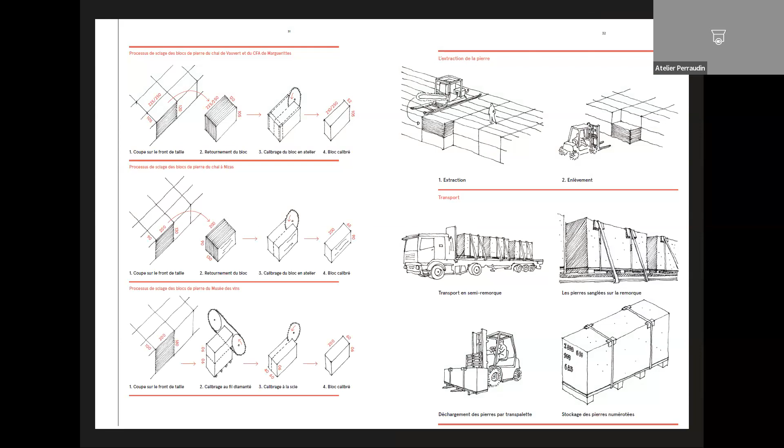But the first question is why we build in stone. It is not because it is a beautiful material. It is for two principal qualities. The first quality is it is a natural material. So we try not to use concrete to preserve the environment, because concrete uses energy, of course, but also sand and water and very rare material. And the second is because it is a healthy material. The first building of our office was our own building, our winery, because we make some wine in the south of France, in Vauvert. And we searched for healthy materials without any chemical emission. And you don't have a lot of materials, because wood has some treatments. Concrete, don't speak about that.

And stone was a very good material for a winery, for the inertia of course, because we are in the south of France, it is really warm, and we need something to keep the coolness for the wine. But if we do it for wine, why don't we do it for children, for school? I think it is more important to use good materials for children than wine, but I really like wine too.

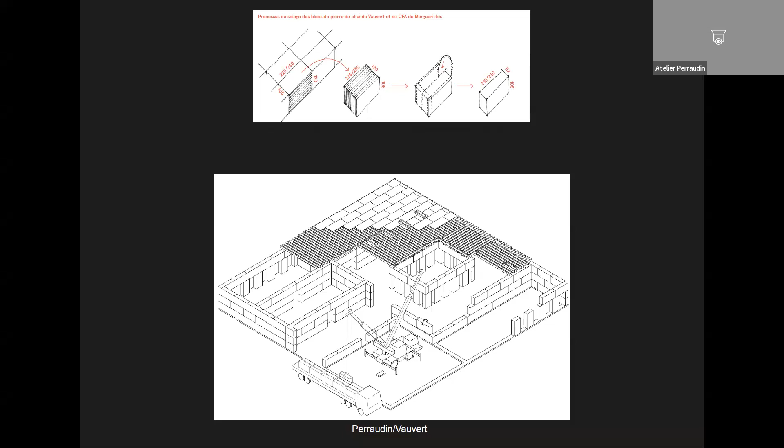So I will make a short introduction to describe what is stone, what is a quarry, because you can't understand massive stone, structural massive stone, if you don't know what is a quarry, what is a block of stone, how you get it, because it is the start of our work. You don't build the same with very stiff stone and soft stone. It is not the same, and the extraction is very different too. I will explain different projects, and every project depends on this stone. So you have to know that.

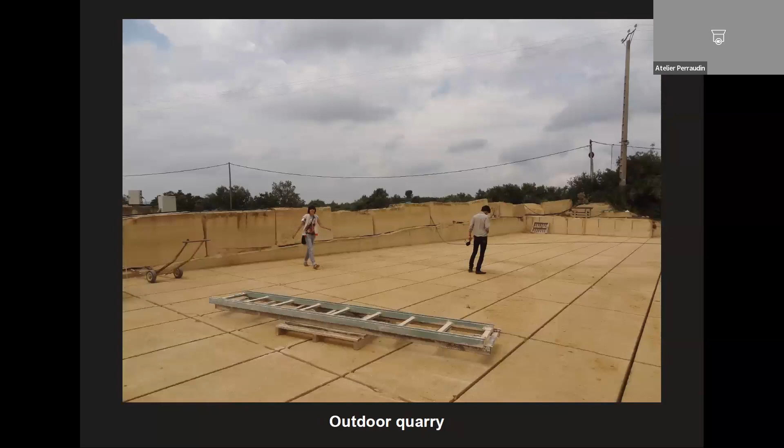It is a really big quarry. They don't work anymore, but it is very beautiful. The problem of the underground quarry, you know, is that you have a tunnel. You have just one way to extract. You don't have the capacity to extract a lot, but you also have the outdoor quarry. This is the cheapest one, because I didn't say that, but we use stone because it's cheap. Using massive stone is cheap. We build social housing. We build every program with stone and with the same budget as if we built in concrete. And that point is really important too.

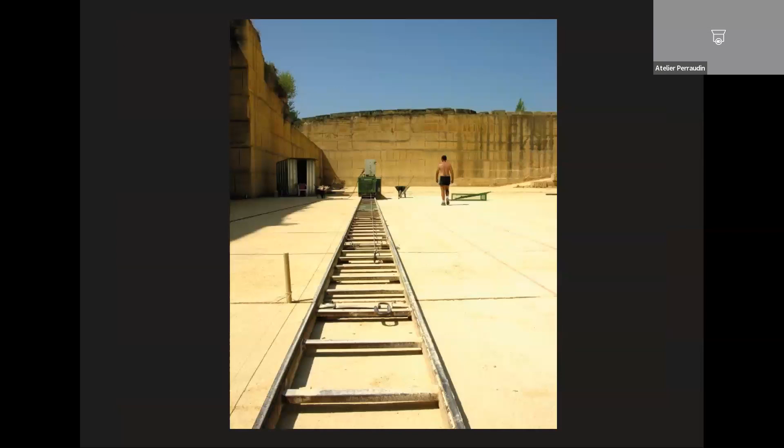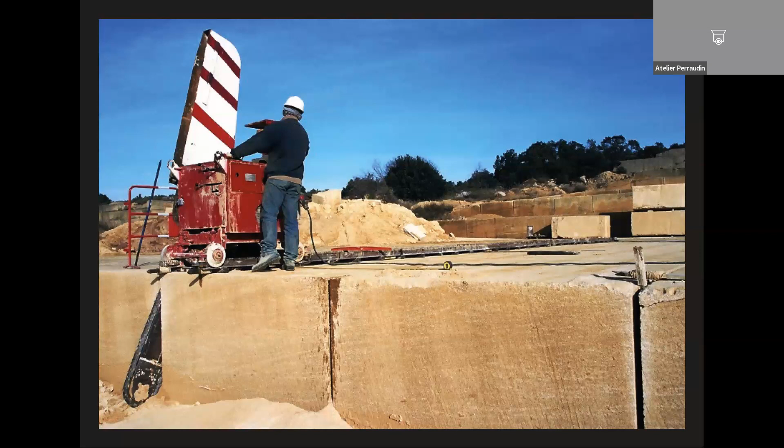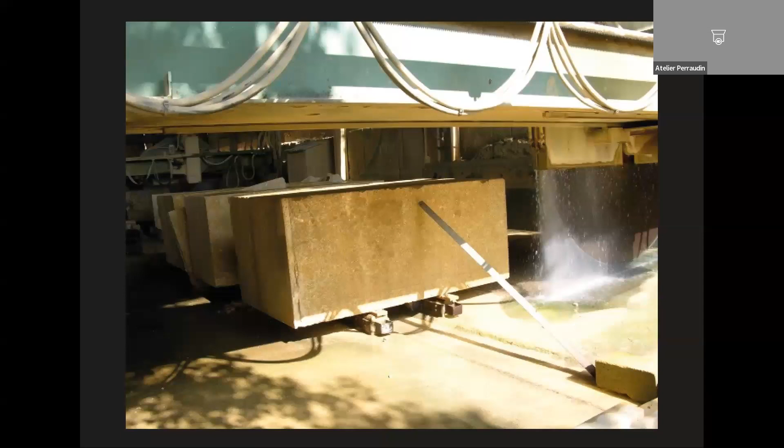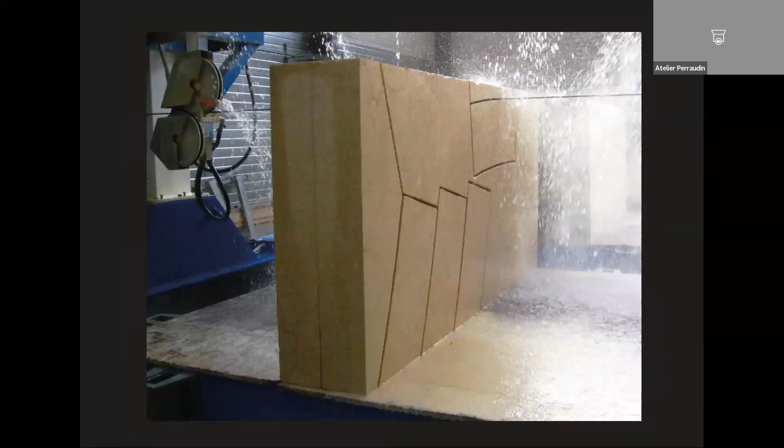So you have the quarry, and how does the quarry work? You have a rail, and on this rail you have a chainsaw, like a block of sugar. Then you cut vertically and you cut the other way, and you just extract it. And that's enough. You have your block to build. Then you have a big saw to cut it at the dimension you want. Or a chain, but the problem of these tools is you lose a lot of stone because you have a particular cut, and if you have a lot of loss, it's more expensive.

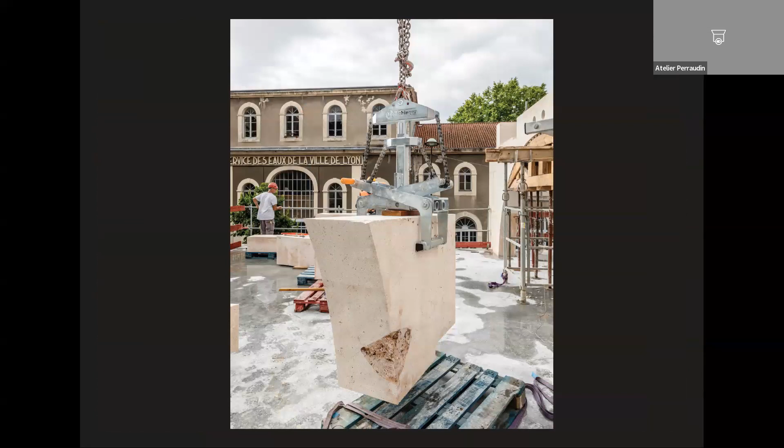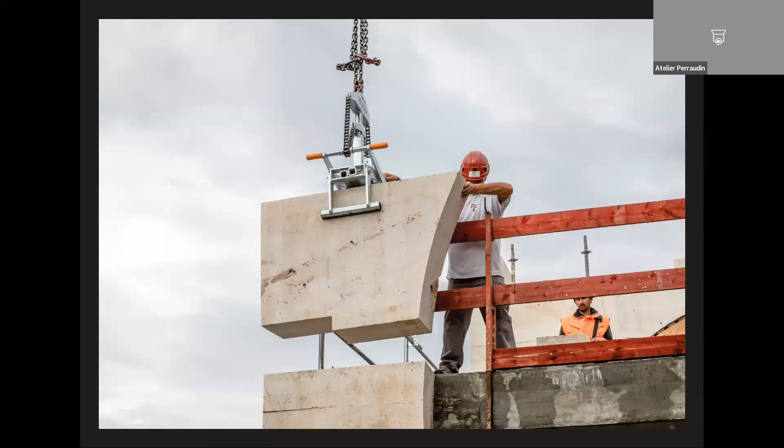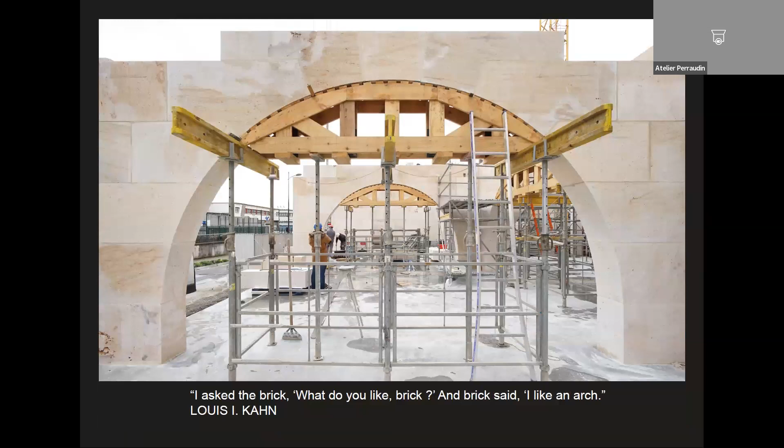It's logical. Then you have a block on, I don't know the word, the pallet. Sorry. You just put a block on the quarry, then you move it on a truck. Then you get it with pincers, pardon. And you just put it on another block. And you can build a very large building with just this simple operation. I will show you. You can also do other things.

We build with structural massive stone arches. It is not aesthetic, I will explain why. But like Louis Kahn said, you have to hear and then ask and hear what the material says. Structural brick and structural stone actually have the same language. If you want a large span, you don't have a lot of solutions. It is the arch or the flat arch.

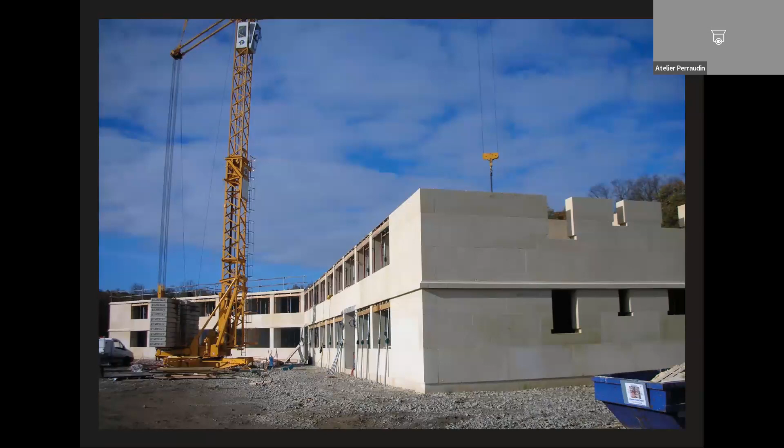So this is social housing. In France, we built it for, I like to say the price because it is very important in France, but I think in Turkey too, 1,000 euros per square meter. So it is all in stone, interior like exterior, with wood and something like that. And it is a really natural and dry building. And for that, every worker who built this housing, this residential building, was very happy.

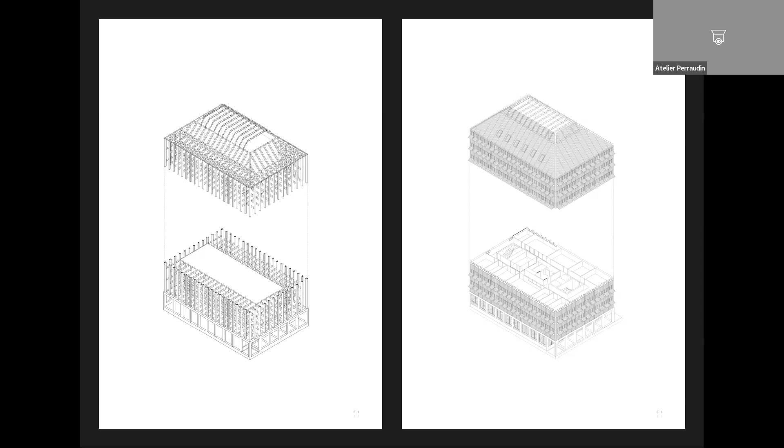We did a tower too, maybe some people will recognize this building. If you speak about towers in stone, you have to speak about Fernand Pouillon. He built a very large stone tower with a lot of buildings in stone. You have a lot of earthquakes in Algiers, with the sea, salt winds, and the buildings didn't move. So if Fernand Pouillon did that, why not me? So we began with this question.

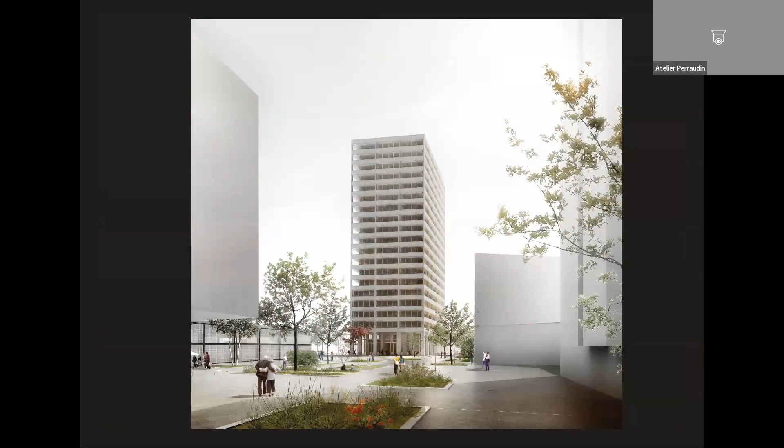So we lost this competition. We had the second prize. The first prize was for Lacaton & Vassal, with the first part of glass, the second part of glass. They said this building was too urban. I don't know what they mean.

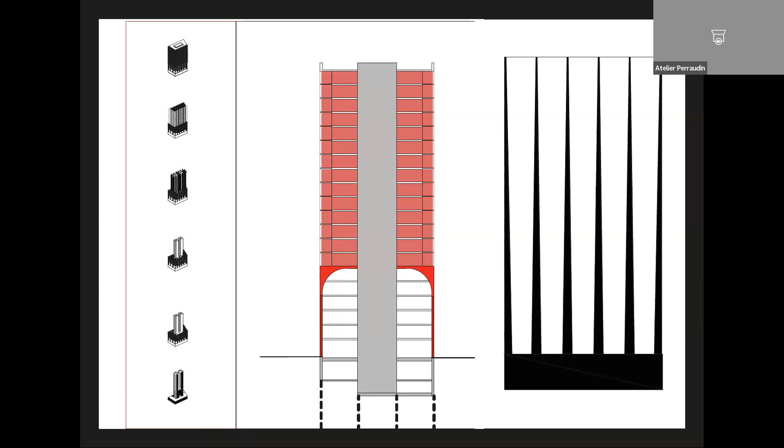And this one had the same solution. We have a big core of the building in concrete, and then you try to take all the strength on the core to rigidify it. I think it is not the good solution either, because you try with duality, the stiffness of concrete and the flexibility of stone. So you have something that doesn't work. When I say structural massive stone, you never have concrete in my stone. I never have concrete in it.

You have the plan, but I will speak with you a long time about this project. We are in Switzerland. We won this international competition of 2 or 4 buildings in stone. Not a big building, but 8 or 9 levels is enough to build in a seismic zone. We are in the Alps, and without concrete.

How did we do that? First, in Switzerland, when you win a competition, you don't win with the engineer. You win as an architectural project, and then they choose the engineer. The first engineer was not stupid, but tried to have some base isolation with rubber like a tower in Tokyo. We said no, it's just a small building. So we won this building.

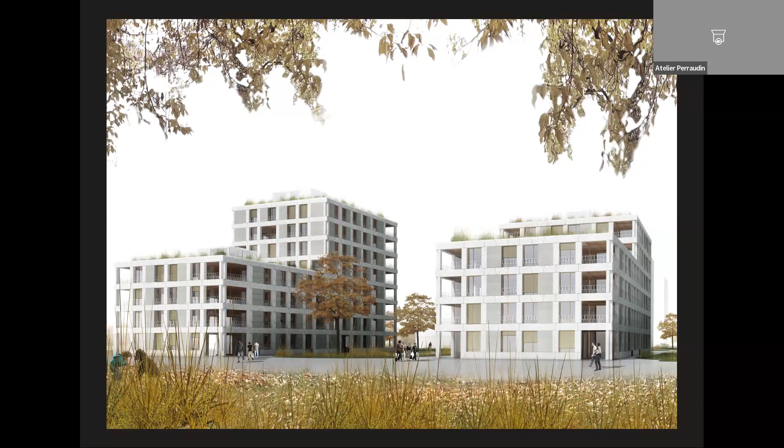And de la molasse de Berne, it is another stone, and we try to build with Swiss stone since we are in Switzerland, but that was a stupid idea. Because we are near Geneva, and Geneva, I'm sorry if you have some Swiss in this webinar, but Geneva is just a part of Swiss in France. So the area of Geneva is France. It is not logical to research Swiss stone.

We have these 4 blocks here, we don't in Swiss. You can work the shape of the building. The shape has a lot of discussion with the neighborhood and something like that. So when it is validated, it is enough, you have to be in this shape.

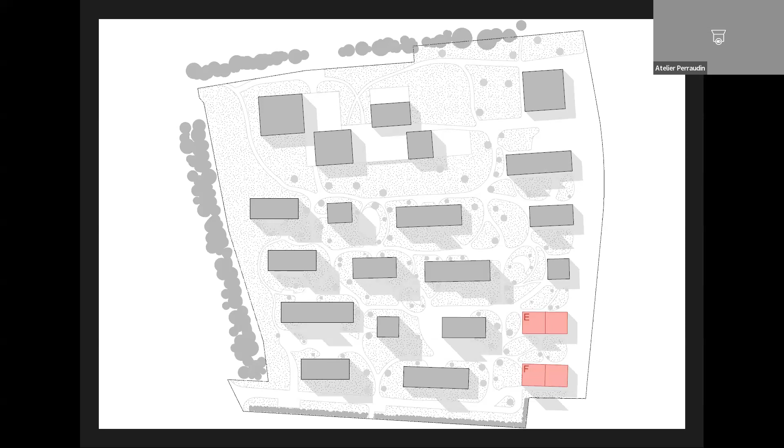So we developed the building. That was the first solution, because you have punctual effort, strength, so you can build with a stiff stone. After that, you have to build with 2 to 3 meter blocks. It is really hard to have it, it is expensive. But if you do that, you have to use stiff stone.

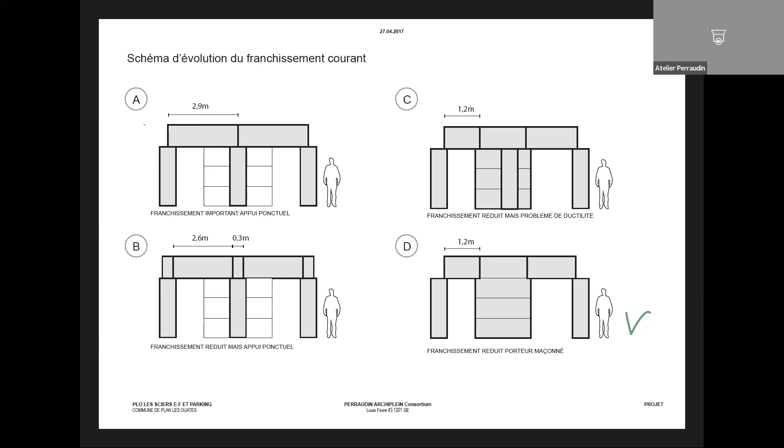But if you work with the largest wall, it is natural, you can use a soft stone or softest stone. So we change the building. The aesthetical for us, it is not the principal point, it is not the goal. We just want to build in stone without concrete. So if we have to change the aesthetical of the building, we did it. And we did it for every project of the office.

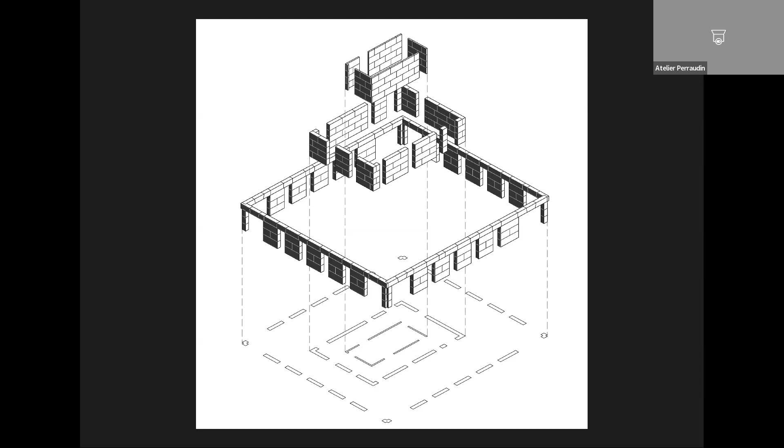But in stone, it is really more important for us, because we don't want to have solutions with really big beams in concrete or something like that. If you want to stay with the purity of stone, you have to have the purity of the conception.

So you have the purity of the plan too, the plan is very simple. You have the first wall exterior in stone, a second wall interior, and a third one in stone too interior. So for concrete it is perfect, because you don't have any direction of the strength. If you have an earthquake, you can take it in X, Y, or Z direction, it is not a problem.

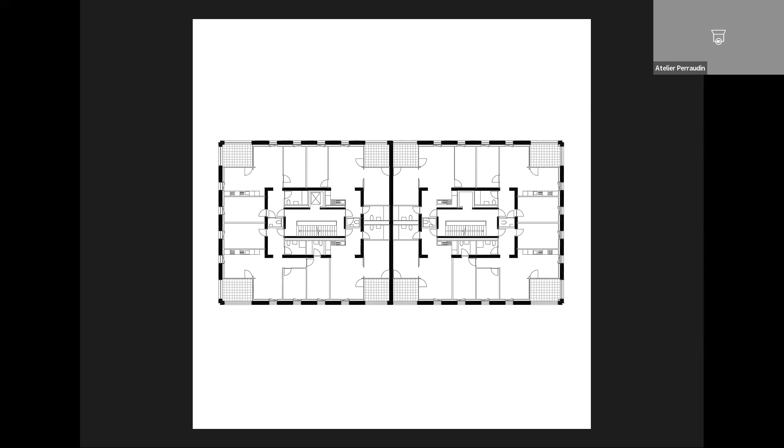When we build in stone, of course, we did the stone layout. This was a big part of the job, you draw every block of stone. We drew around 4,000 blocks.

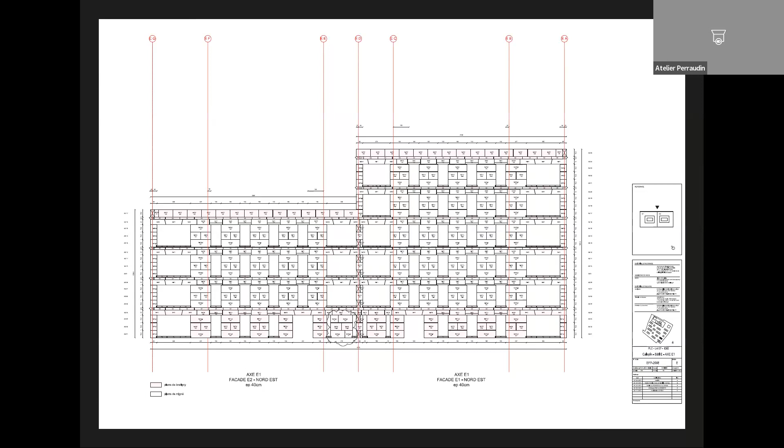Some blocks are similar, but you try to make them similar, because you don't want to draw 4,000 different blocks. But you have to draw it, write on each block.

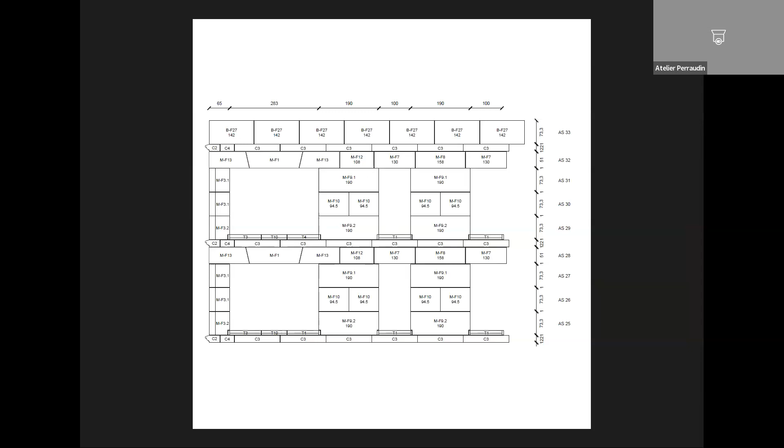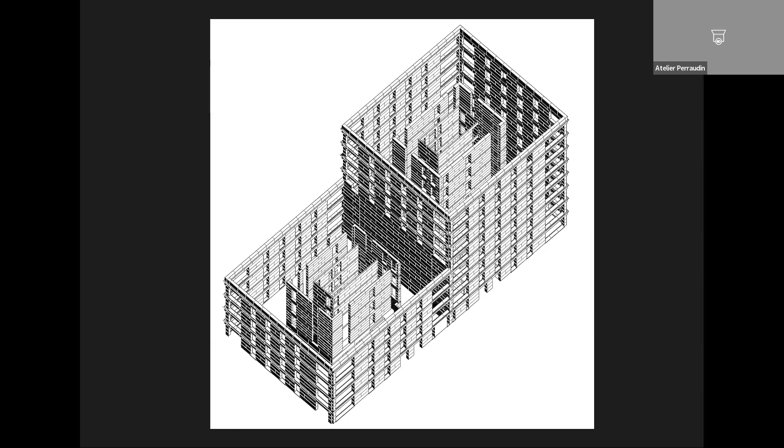So SketchUp is a good way to draw this building. You can't draw massive stone with Revit or Archicad. It's really hard, because you don't have the conception of a linear wall when you just put some window in. It is the structural stone, the block, that builds the building. So the way to think, it's better with SketchUp and draw in your brain than Revit or Archicad. But sorry, my brother is an architect too, and he is Autodesk elite and works in Revit, but this is my thing.

And so you can see, you just have the floor put on the stone. This is the draw of the office. We draw everything, and nothing else. And it is an energy building.

It is like a passive house, and we had a big problem because you have to put your floor on the exterior wall, but you don't have to put your floor on the exterior wall because you have to put some insulation. So it is something really weird. So we have something really simple. I don't know the word for this part in English, but it is very simple. You have, and it is very stupid, because you have a big building in stone, but you have some...

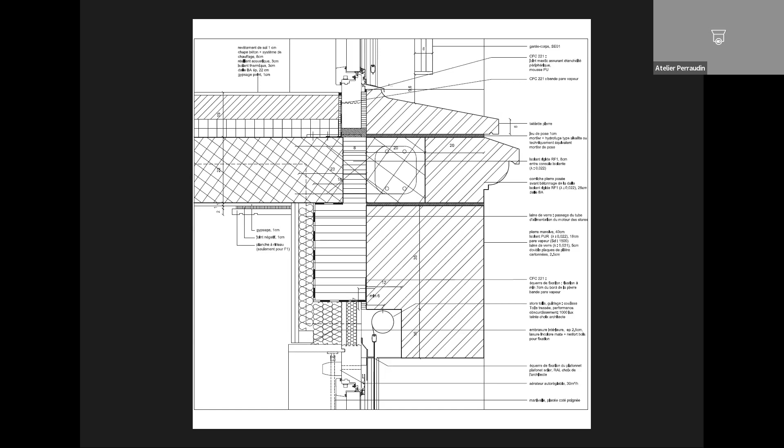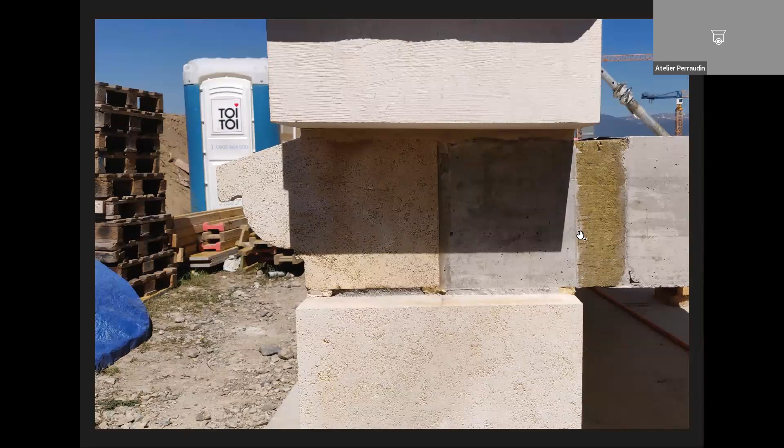Well, it is very simple. And this is the detail. It is simple, but not easy. You have around, we have...

A geologue, sorry, I don't know the word in English. A geologue, we have geologist. A geologist for the building. You have around three different structural engineers. Very complex team for this building, just to put a block on another block, on another block.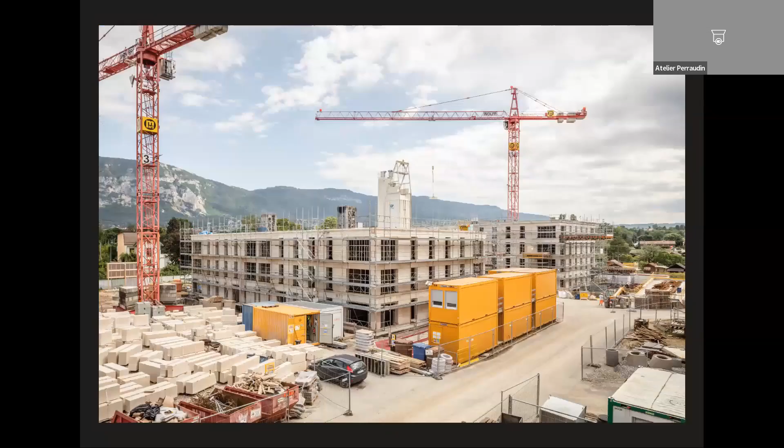So it is simple, but not easy. And this is, so the building, the office who built this was Marty. He never put a massive block. Gilles Perraudin says a massive stone block is like prefabricated concrete, but a natural prefabricated concrete. So the masonry said, oh okay, it's easy, you just put a block on another block. So Marty did it. So you see every block here.

You just, I don't know the word for that too. It is a word for, sorry, you see my mouse, a crane, sorry. You have just two cranes to put every block on each one, and you build the building like that. Each block has its interpretation. You get it. And this is the building at the end without the exterior, this is very simple.

Just when we rediscover stone, we rediscover what is for us architecture. Architecture is just light, materials, and rhythm. It is not the engineering and something like that.

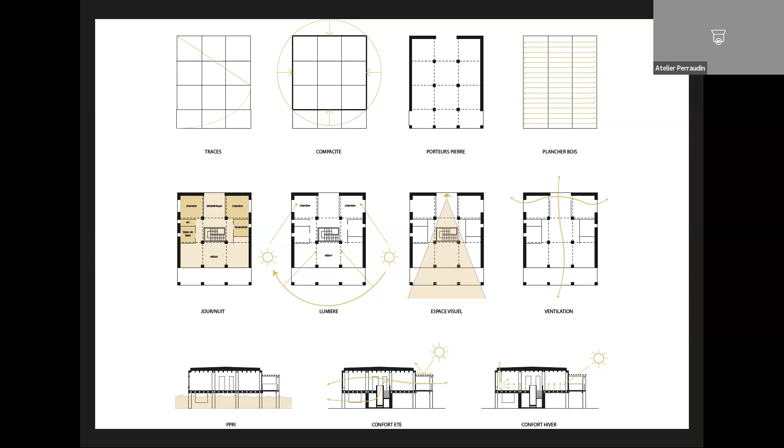So this is the house, very simple. The client was an artist, but he said, I will not put pictures on my wall because the wall is the picture. When the light changes on this wall, the spirit of the house changes - let's say I'm more radical - the spirit of the house changes with the night or the day, with the light of the morning or the light of the evening. So he's an artist, but he never puts pictures up.

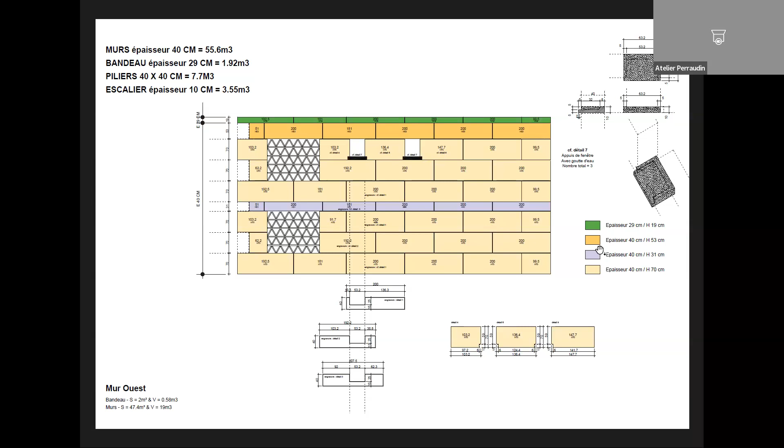We try to build, in each project, something more. In this one, we built the stair in stone. It's not really art, just a particular layout, but you can do it. And we did the stone layout, like every project, every block is drawn. You did it.

But in stone, you can do a lot of things. This is not our last building, but this is a particular building with an eye. It is a reference for Louis Kahn, of course. But this eye is not free.

We never have a free draw. Every draw costs, and a draw costs for the structural. And of course, if you draw something in stone and you don't follow the stone rules, you have to put some concrete, and then you have some problems with the construction. So you have to follow the rules, and then try something to make something coherent.

Why do you have an eye here? Just because it is a mixed use building. On the first floor, you have, sorry, I don't have the word for une menuiserie. Window frame. Window frame on the first floor. The second floor is an office. The third floor is for student housing, and the two last are for just the clients.

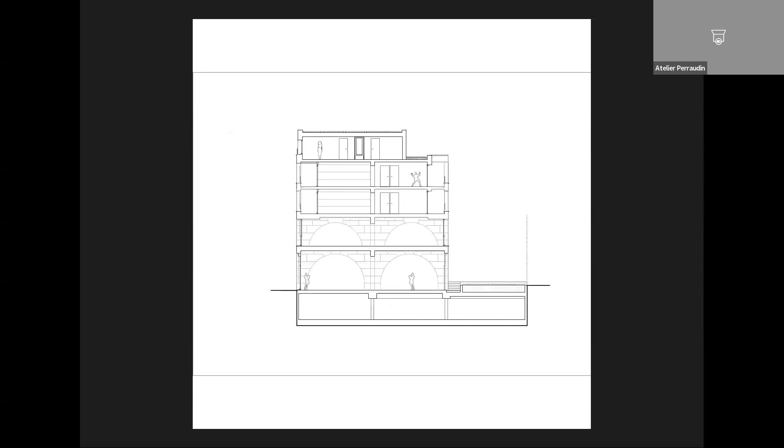And you can see, of course, in every project, every wall has to sit on the other wall. So when you have a mixed use, you have to make some combination between different programs to put it on the other wall and the other wall. That is the complexity of the building. If I put this shear wall here, that will be a problem for the structural, because you have how many tons of stone on the floor. That's not a good idea.

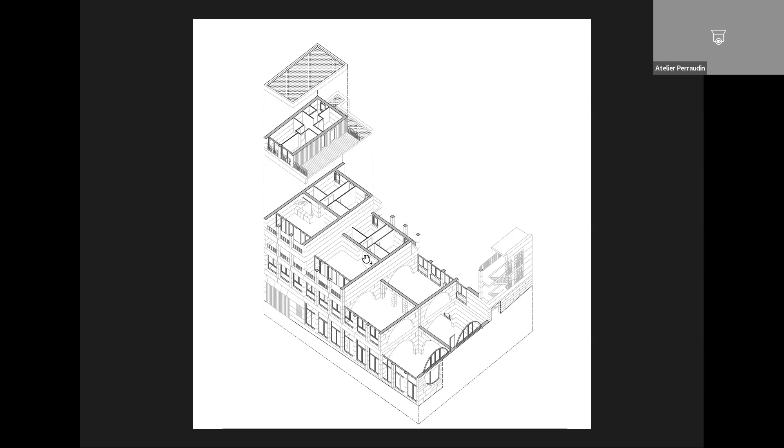That's the draw. So you can see the arc on each level. This one was an open space, because every office now works in open space. I really hate that, but it's better to say it. And then you have residential student housing, and then duplex for the clients.

Yeah, we liked this view, because we see how the structure builds our conception. We don't have a skin on the building. The skin and the structure are the same thing. So you have to hear what stones say to you.

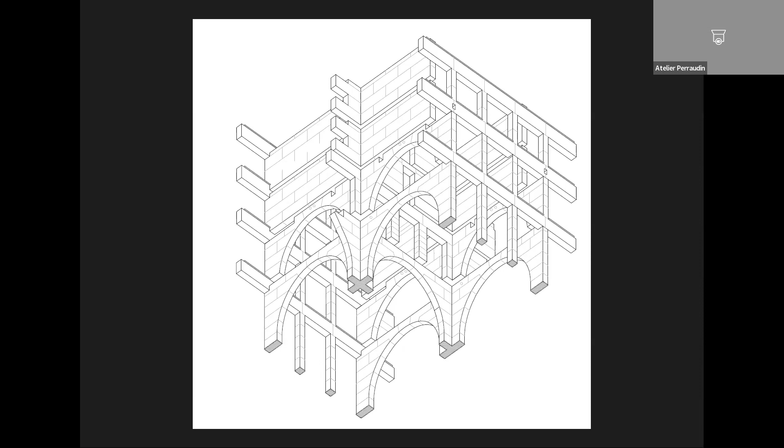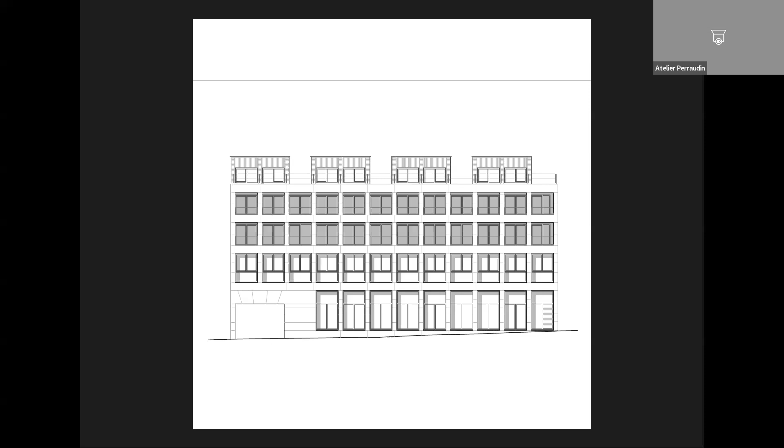It's very important. And this one is a very different thing than the other building, because you have a grid here. Why? How can we have a grid on a building of stone? Because my wall is a shear wall. You have to stabilize my building. But we can have a grid because if you see the plan, we have a cross here. So I have a free draw on the main elevation. So every part of the conception is linked.

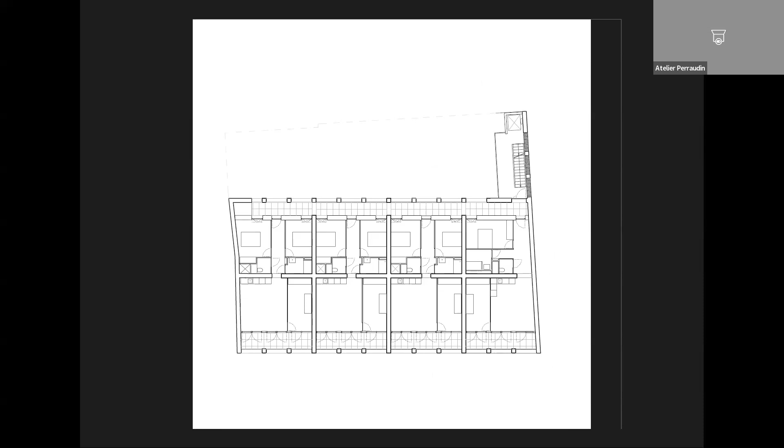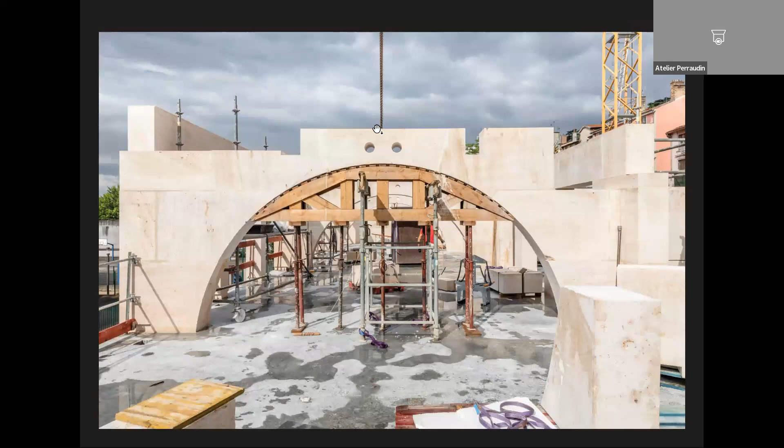So just a small draw. And here is the building on the way. I will not say it is really easy. Easy, not simple. No, or simple but not easy. To have a draw, you have to understand how stone works. Stone works with 2 points: friction and its weight.

If you put some concrete in there, the friction, so the movement in the stone, doesn't work because you have some concrete in the stone. The movement is blocked, and if you make a void in the stone to put some concrete, you lose the weight. So it's really a bad idea to mix concrete and stone.

And I will not mention the problem of dilatation when you put concrete and stone together. Dilatation? I don't know the word. Dilatation, yeah, it's the same. Dilatation of stone and concrete. So when it is warm, the steel of the concrete grows more than the stone. So you will explode everything. You can try it, but I will not. It's a beautiful construction.

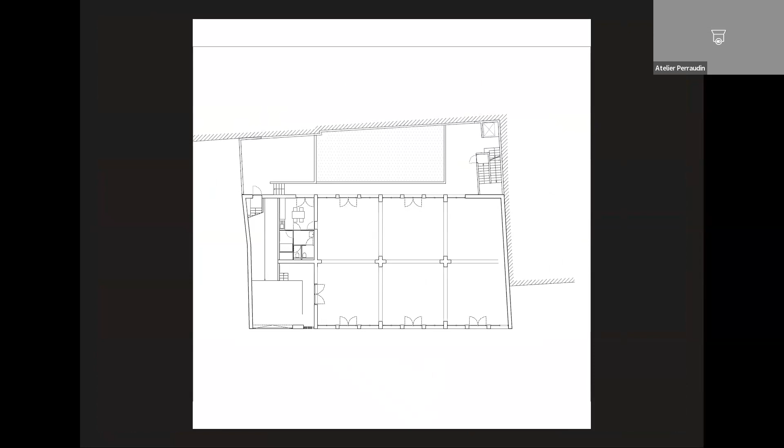Just a room. And sometimes here we work with two, maybe you saw that, different types of stone. Why? It's really stupid to have a concrete wall of something like 20 centimeters at the first floor and the last floor. It's stupid. So in stone, as you are in the economical way, you use a better stone for the first floor than the last floor.

It is logical. For this one, we use this stone. It is the Marina stone. It is a Spanish stone with something like 150 MPa. And here for this stone, it is only 20 MPa. But here you have the arc, so you need a very stiff stone. This is a way to build with the same width of stone.

We need 40 centimeters. But in the project of Genève, we work with different widths of stone. We worked at the basement with 60 centimeters and the last level with something like 40, because it's logical. This one is not a really hard zone for earthquake. We are only in zone 2, not zone 4 like Genève. But I think we work the same way.

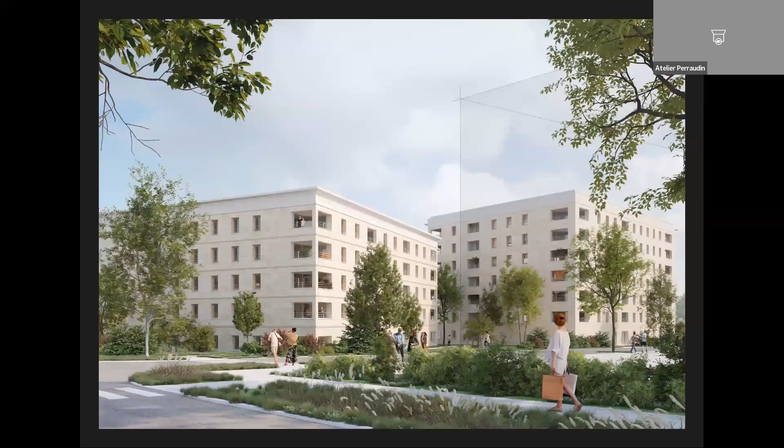So this is a big building in stone. Big, I don't know, but it is around 4,000 cubic meters of stone. That's enough for me. We are trying another one in France, in Lyon, around 6,000 cubic meters of stone, which is not a problem. You have to have a good organization when you buy it.

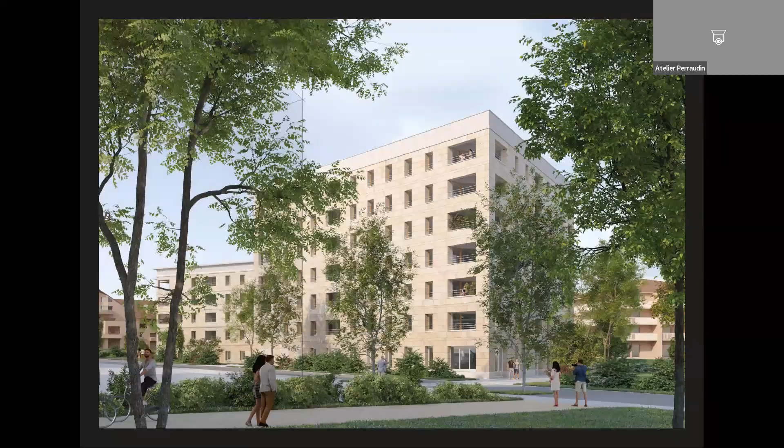So I will just explain how earthquake rules work in France, because that's why I told you at the beginning, rules are stupid sometimes, not every time, but sometimes. Because this building is 5 kilometers from the project in Geneva. It is very near. But it's not the same country, so not the same regulation. In Switzerland, they do what they want. In France, we use code. So Eurocode 8 in France. It works in Italy, everywhere in Europe.

It's not completely stupid, because you have some rules to build it well. So you have the rules of symmetry. Because the earthquake works in different directions, and if you don't want to have more strength of the earthquake on a part of the building, you have to build it symmetrically. You have the compacity, of course. The more compact it is, the more effort it can take.

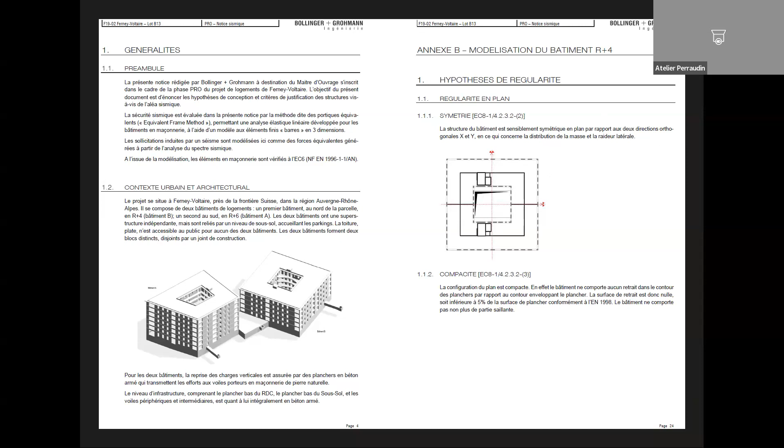Slenderness. OK. That's why it's stupid to build a tower when you are in an earthquake area, I think. Sorry. You have the regularity in elevation. Of course, I told you about that. But it is our way to build, to have the conception, so we don't have the problem with that.

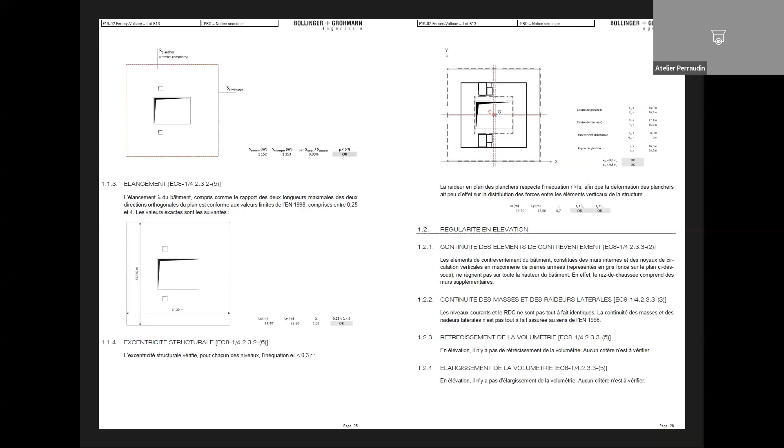And we have a really good engineer in France. His name is Paul Roman. He is a big one. He works in Germany, everywhere. And he proved the building works without concrete, because it is clearly the same as the building in Geneva. But the Eurocode says you have to chain the stone. But I go to the control office.

I don't know if you have a control office in Turkey, but maybe, I think.

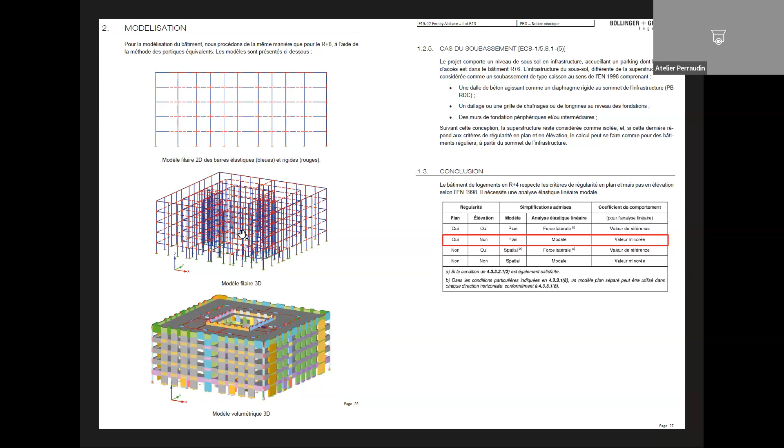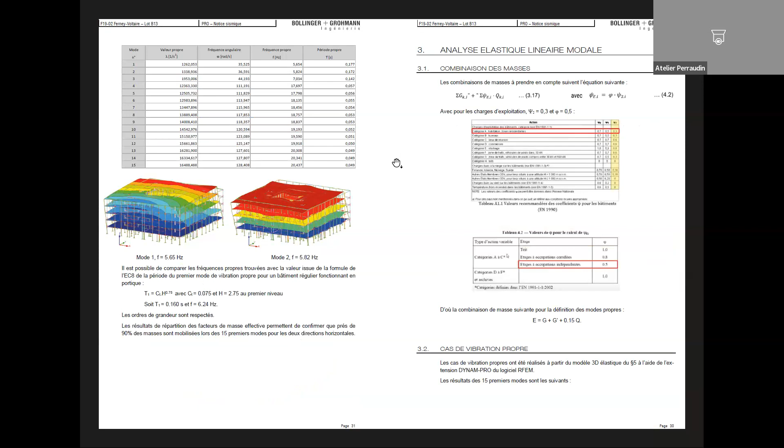So this is the first building in France where we use the filaire conception of the building. It's something like using a bazooka to kill mosquitoes. But we try to. So we modelize every block, and you can see here. So it makes the model in an elastic linear model. And it works at the beginning, it works at the end, but we use that.

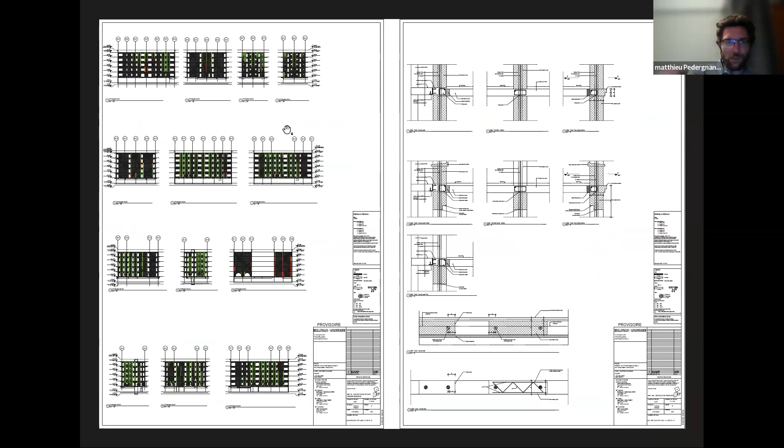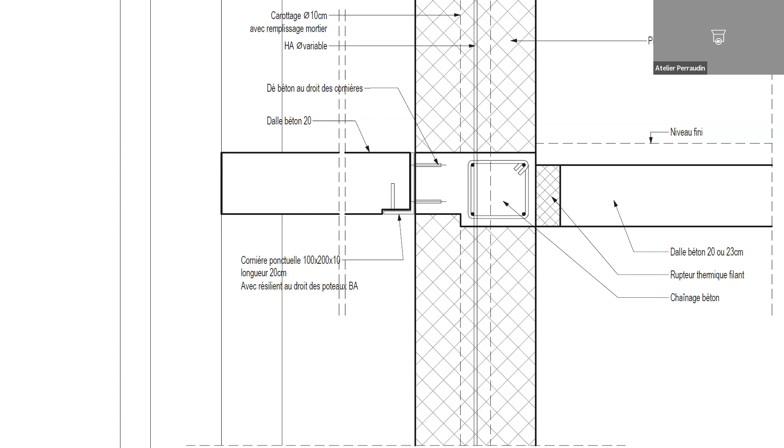But he said, the Eurocode, if you want to build it and have some insurance, you have to put something in your stone. And okay, I will put something in my stone. But I don't have the chain, because with chain in France you have to put some concrete on each floor with chain in concrete, etc. No, I work to have just an HA. An HA in France is just a thin steel in my stone, and each floor is attached between them to make a constraint between floors. My stone can't go to the void.

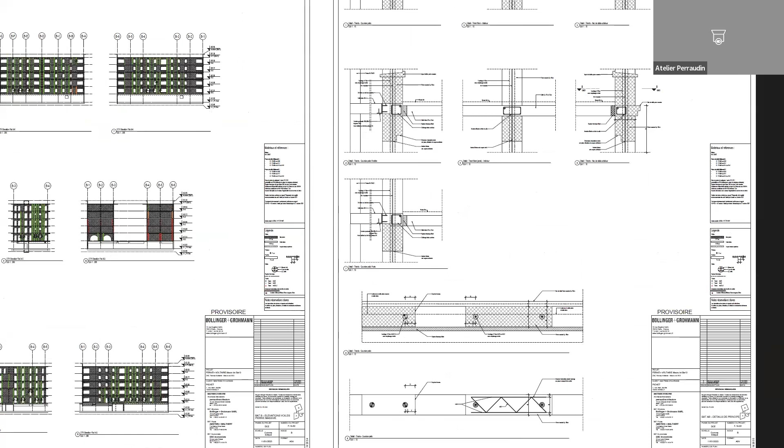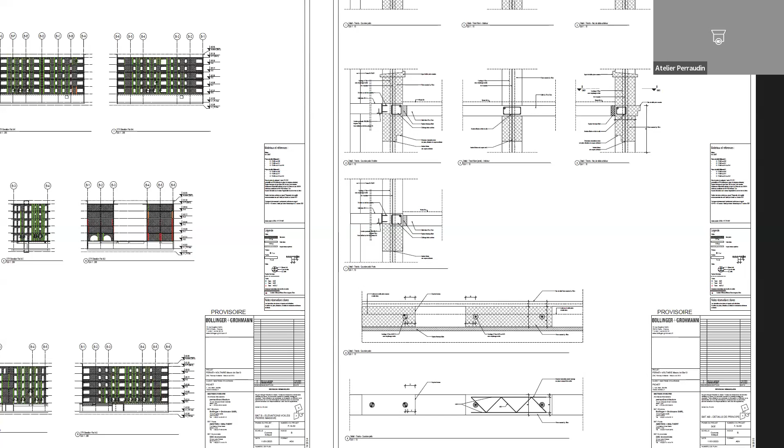So you have just some steel, but without concrete, because concrete is not a good word. Concrete is not bad, but armed concrete was not a good idea. You have just a steel between floors attached between them to get the rigidity between floors, but not between every block. And we begin this building, I think, next month. So I hope that will be a good idea and not too hard for workers, because they have to make a void in each block, put the steel, attach them between floors.

I just want to put a block and another block. It's easier and it works. But the rules told me you need that. So the rules say something good like symmetry, elevation, regulation, something like that. But they can tell you something stupid. So I don't know if you have rules in Turkey like that, but I think the only rule you have to follow is to have a logical building. You have to think for the area, not for the rules.

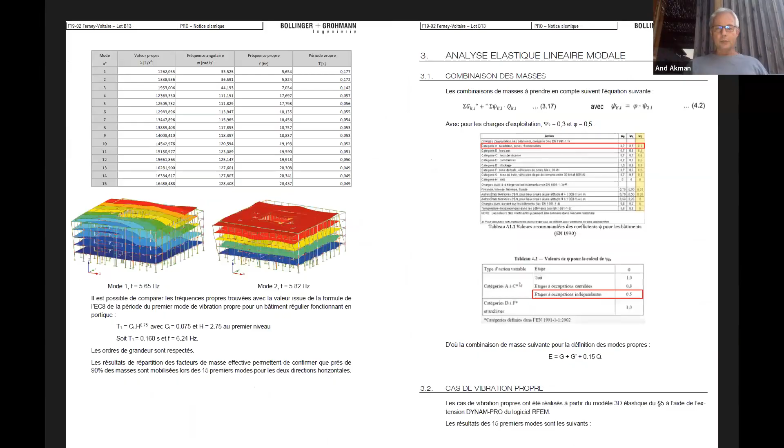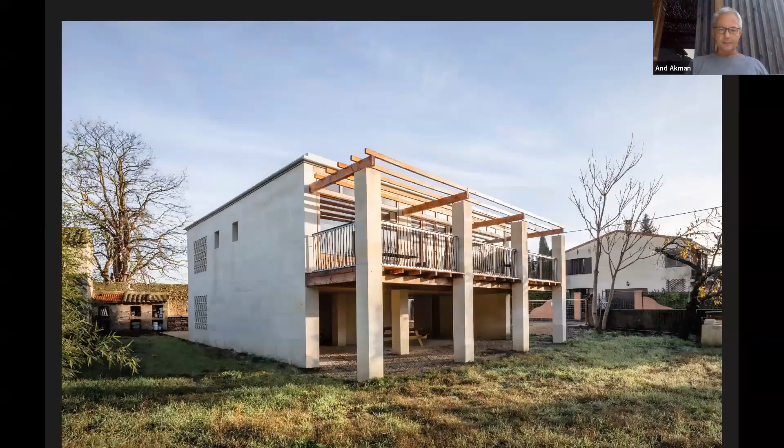The first is, I think it was the third example you showed us, and it looked like you used a radiant floor. So my question is, have you integrated radiant floor systems in your projects? Not this one, the project in Geneva. This one. Just the beginning, the wooden house with this wooden outside. Which project? You have to go back.

It was just the detail, the third one you showed at the beginning of your presentation. This one. Yes, exactly. It looks like it's a radiant floor, but is it really, or what's your opinion about radiant floors, to integrate them?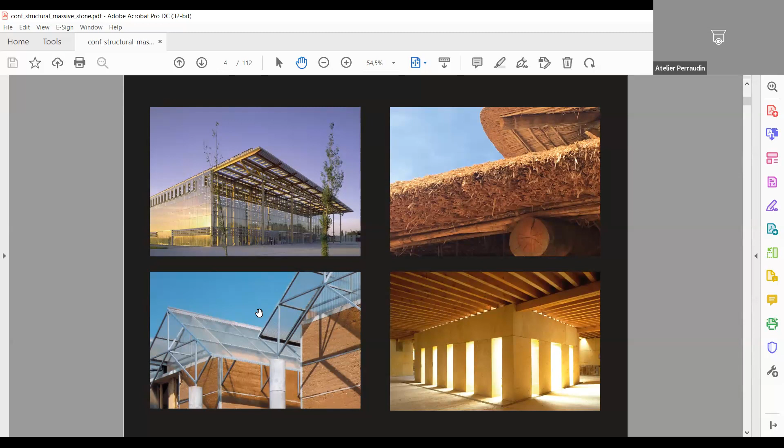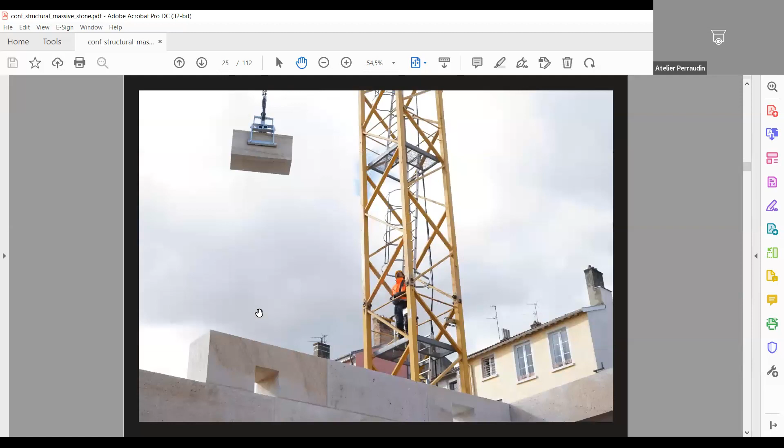So maybe we could for the building, but we didn't have the money. That's why we didn't use that. Voilà. And also, sorry, we are in Voiron, in Isère. It is the country of earth in France. But I don't have the money, that's why I didn't choose it. And that's why we use it in Senegal, in Africa. The paradigm is changed: the materials cost a lot, but the workers don't. It's cheap. Yes. Okay. Thank you very much. So, second question.

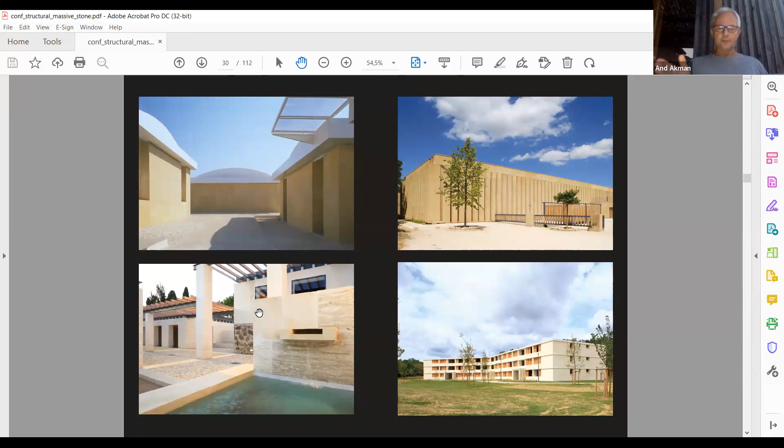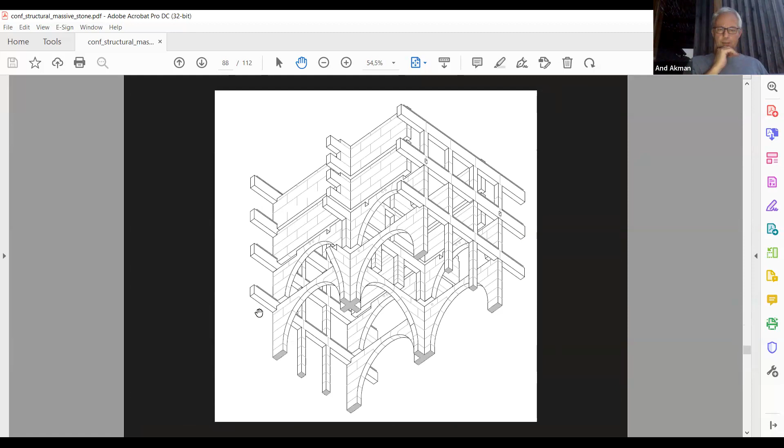You showed a project with these arches. And there I saw, I don't know how much you are integrated in that, but I saw wall heatings, not roof heatings. Sorry. I think it was that project. If you go back one of the pictures, I saw them inside the building, for the heating system. Yeah, here, this. The panels on the roof looked like roof heatings. Or is it something else?

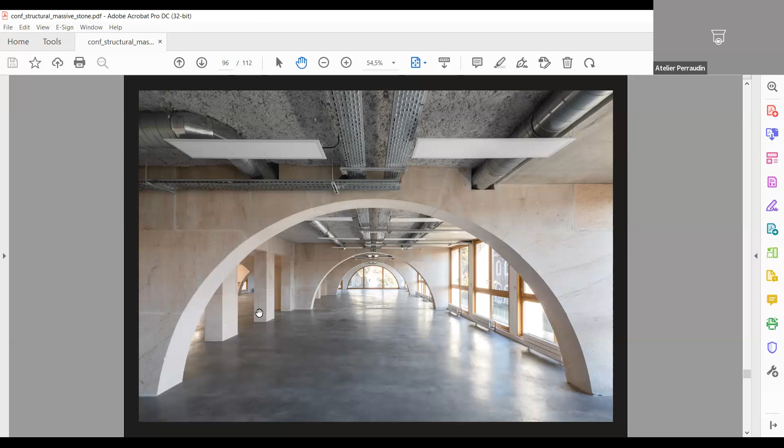That's just that. Great. Thank you very much for your valuable information and presentation. Thank you. You're welcome. So thanks. I don't know if there is any other question. I have checked in the chat.

I had one question. In small houses, stone houses that you also showed in your projects, are you still using cement in the foundation? Or how do you resolve the foundation in the small ones? The foundation depends on the ground.

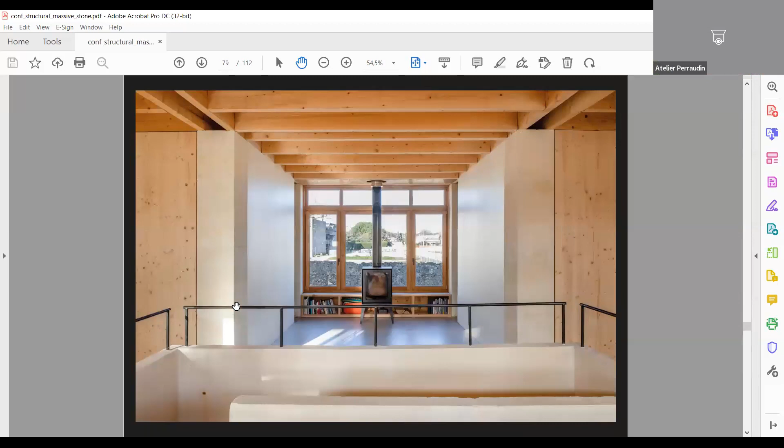In each project, in this project? Two stories. On each project we have a different foundation because the floor works differently. I prefer the superficial foundation, but we tried on another project to have a stone foundation too. Yes, with stone and some wood to connect them so there aren't any movements.

It's all, every project is for social housing or so. I try to make the project work with the floor and with the foundation, and I try not to put money in the foundation. I never work without the floor information, and the floor information can change the project. If I have a very bad floor and I need to take some des pieux, je sais pas comment on dit des pieux.

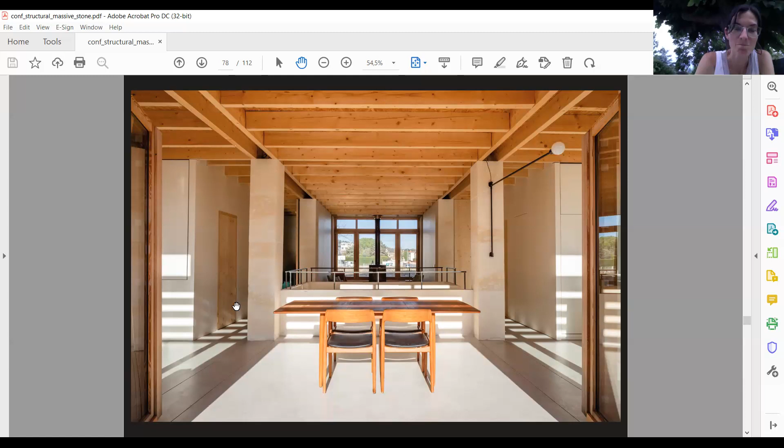For every project, are you working with a different engineer, or is it always the same engineers that are expert in stone? Every project is a different engineer. But I draw everything. I'm not an engineer, but I know how to read an engineer's note. I draw the structure. I draw the economical. I am a good engineer too, but they are here just to allow my drawing.

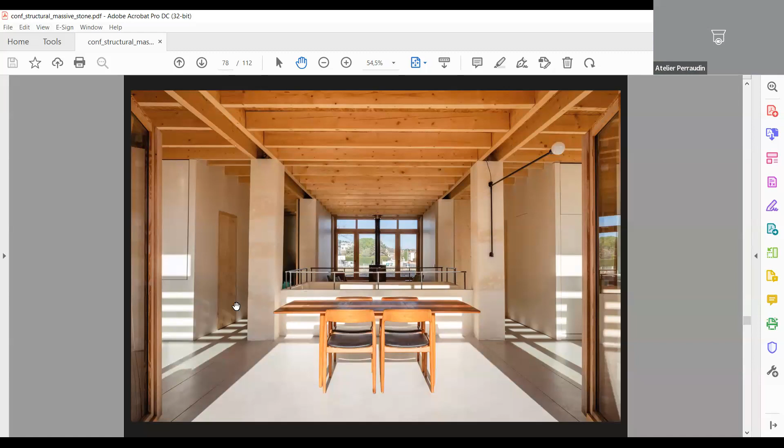And Gilles Perraudin said that, because he was high-tech before doing stone, and he worked with Peter Rice, a great engineer, and Peter Rice said when the note doesn't work, redefine the note, recalculez-le jusqu'à ce que ça marche, et ainsi de suite. In fact, when it doesn't work, we just make the calculation again until it works. Yes. But we are not easy architects.

Okay, and I think there's a question by Zeynep Seyma. Yeah, hello. Thank you very much for your presentation. In your Geneva project, I think it was the social housing with a concrete floor, I have a question about it. You've said you avoid using chains and you also avoid using cement-based mortar.

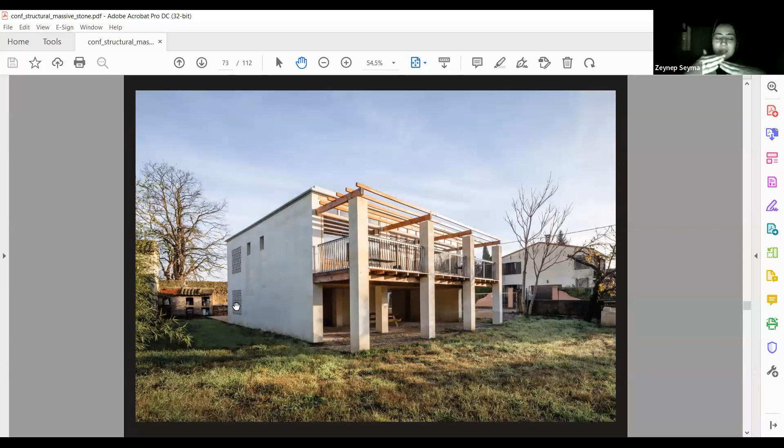So I wondered, where the floor meets the stone walls, these walls, yeah, here, do you use any material between the concrete floor and the stone that makes a barrier between these two, because you don't want them to break each other, right? No, you have nothing between the floor and the stone.

On the last floor we have not chains, but some steel to grab the stone, because if you have an earthquake, the stone must not fall. Just on the last floor. After, it is the friction and the weight of the stone.

Negligible? Very little, you mean? The friction, so they don't need any. The friction is enough because of the weight of the stone, so the stone will not move. They will not fall. The weight you have, I don't know how many tons, that's why you can't move it. On the last floor, because you don't have any weight, so you grab it. Okay, thank you very much.

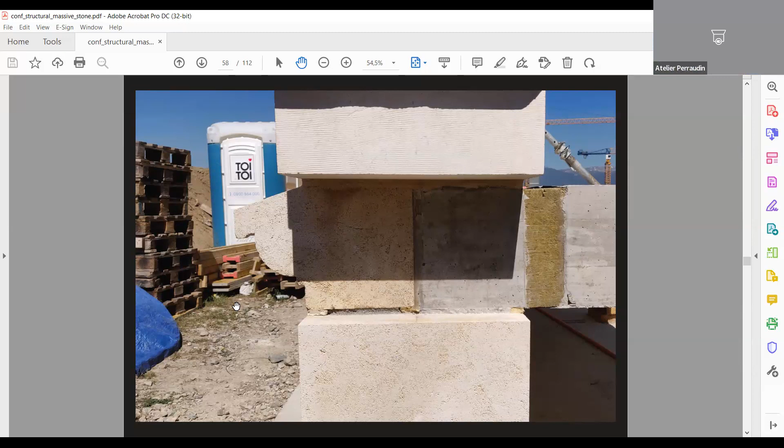These earthquake calculations are made for which degree of earthquake? I think we are in the hardest zone in Europe. In Europe, in the Alps, it is zone 4. You don't have zone 5 in Europe. I can share a map.

While you were speaking, I was marking the map of the project with the earthquake map, so I can show this. For Europe, I don't know the magnitude. So here is the earthquake map. Can you see my screen? Right now, yes. So you can see the earthquake map of France and Europe. The red colors are the most risky zones with the highest magnitude earthquakes.

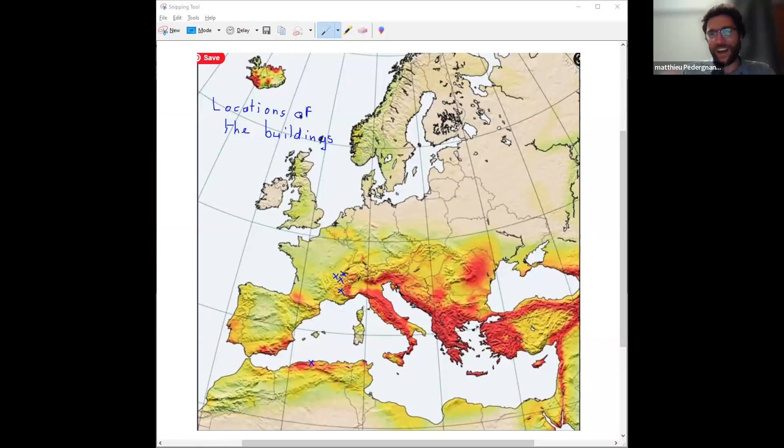So the zones where the projects presented by Jean-Manuel are here, the crosses. This is where all those buildings are, and compared to Europe it is high, but for Turkey it's low. I think we are not red, we are orange - in Turkey we are red, half of Turkey. We are a really small map, some small areas are in zone 4, small areas are in zone 3, something like that.

No, you're right, but in general the magnitude in Turkey is much higher than the possibilities in France. But I think it's not a problem of the magnitude of the earthquake, I think it's a problem of the height of the building. I'm not an engineer, but if you did the same building but 3-4 floors, just a small building, we'd have no problem. The problem is building towers and something like that. With the investment, it's a stupidity to build towers in earthquake zones.

I think people talk about this after the earthquake. The main first statement was this: the building should be maximum 4 or 5 stories. I think it's enough, but it's not a problem of density.